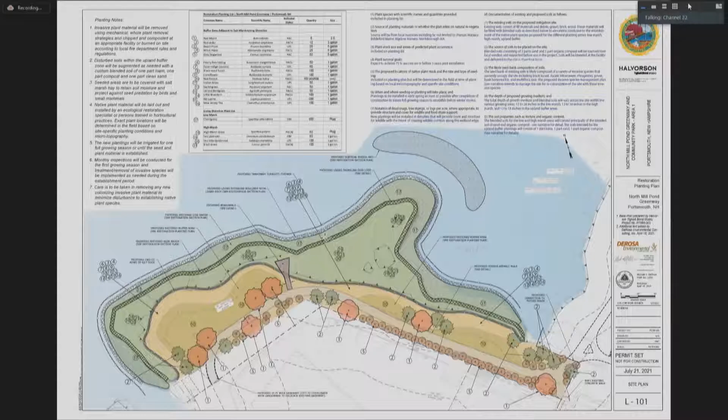At the October meeting, you folks had expressed concern with the size of the boardwalk. So we have since reduced the scale of that, in fact, over half as much as what was previously shown. It previously had jutted out in this position around the tower. It was over 700 some odd square feet. So it's since been reduced to just this little vantage point out into the pond. The reduced impact is over 375 square feet from the previous design.

And again, that boardwalk design contemplates a grating rather than a traditional wooden boardwalk, so you're getting that light through the pier itself, and we're also using those helical piles to minimize the disturbance for the support of it.

Number two, you folks had expressed in October and discussed further at last month's work session the concern with the width of the path. The 10-foot is a standard that we're trying to hold, particularly with a dual-sided multi-use path. But we've taken away those 1-foot gravel shoulders on either side. It's basically the same detail you can see if you're familiar with driving in Pease down Grafton Drive. That's a porous asphalt path, so it's basically the same exact design.

And the third point was the existing trees greater than 6-inch caliper will remain on site, and we agree to that. We haven't done a detailed tree survey yet. That's something we'll have to go out and do and mark. Certainly in the vicinity of the path, those trees would need to be removed. If any of the grading impacted the health of the trees, those would need to be removed. But we know you folks are trying to keep those larger Norway maples intact, greater than 6-inch caliper, so we agree to that. So that really is the summary of the changes to the plan.

Other questions, commissioners? I had a couple of questions. One was on C-101. It says you're going to be removing the no digging and the no trespassing signs.

I know that on North Mill Pond there's a lot of issues with digging, so I didn't know if that was going to be replaced somewhere else. We're happy to have you stipulate, work with the city staff on the appropriate signage to ensure that that doesn't occur. And the no trespassing, are we being unfriendly if we? We can't keep a no trespassing sign out there if it's a city park. That was out there to stop the digging that was happening when it was owned by Granite State Minerals. Okay. So just maybe the no digging? We can incorporate that into the signage.

Okay. Yep. My other question was, and this also came up with a comment letter that we received, the concern about geese in the area, because I know that there's another restoration project that is having a problem with geese, and that the large area of the red fescue might be something that the geese are going to be attracted to, and if there's a way to mitigate that. To reference the letter, there were a lot of good suggestions of isolating out areas within that red fescue to have more focused seating areas, rather than a lawnish kind of area.

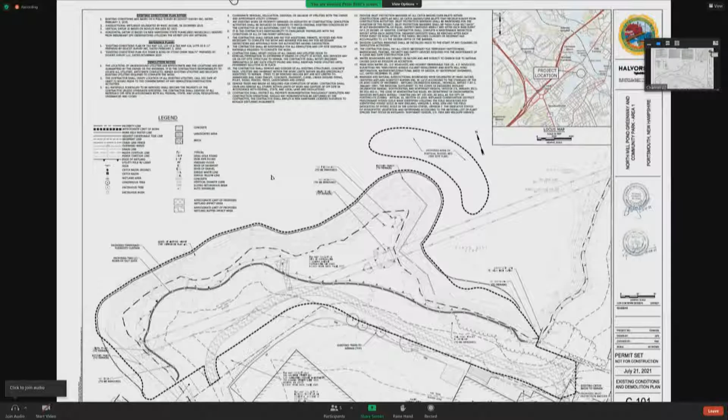Any other questions or comments from the commissioners? Are there any of the public here to speak to that at all? Or on Zoom? Oh, we have a Zoom. Nancy Johnson raised hand. Let's see. How do I do that? Okay, Nancy, can you hear us? Nancy Johnson? Okay, can you hear me? Yep, we can hear you.

I want to thank the Conservation Commission and Peter and Patrick. This is, in my opinion, a much improved plan, and I think it will come out very nicely when it is implemented. The path is much better not having the gravel on the sides. The viewing platform is smaller and relocated. I think that is super. My only suggestion would be that maybe some of the red fescue could be replaced with a conservation mix, which has wildflowers in it, and in places things like our fall aster, which is a beautiful plant and flowers well into the fall. It's one of the last plants for the pollinators and is easily mowed down when the mowing is done. So those are my comments, and I thank you very much for these changes. Thank you.

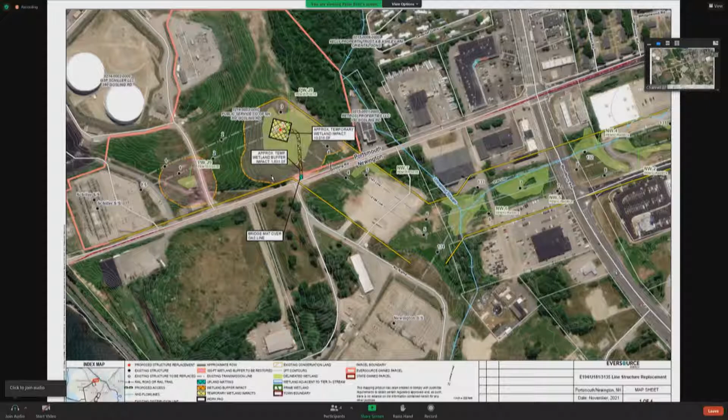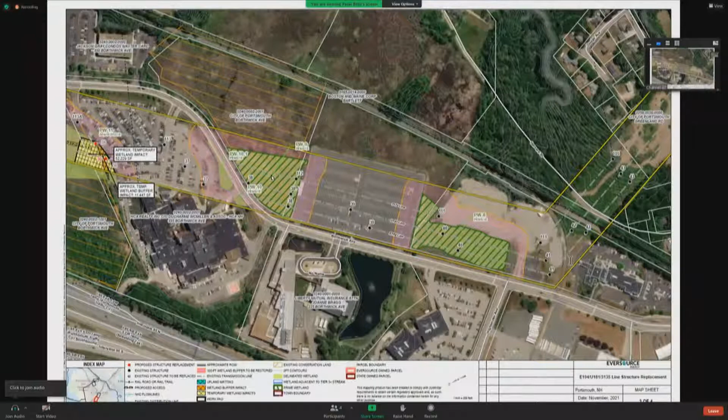So this is the 1 pole off of Gosling Road right here, and on the next page we have the 5 off of Borthwick Ave. Those ones are placed in pretty close proximity to each other. And then the final 2, let's skip 1 more page. And we have the 2 off of Greenland Road.

And so once work is complete, timber matting would be removed from the wetlands, and the wetlands would be stabilized with a seedless mulch to allow for stabilization. Eversource and GZA, we have coordinated with the Natural Heritage Bureau for rare species reports, and there are some rare plants in the vicinity of the right-of-way. However, with the timing of the project, they were okay with us using timber matting as a best management practice through these wetland areas.

And we're also in favor of not putting a specific seed mix down, in fear that the seed mix that would be used could outcompete some of the natural seed bed vegetation that's in the wetlands. And so at this point, we're proposing to stabilize with a seedless mulch. Are there any questions? Thank you. Any questions from the commissioners?

Yes. Andrew? Will machinery or tools be left on site when you're not there, like during off-work hours? They cannot be left in wetlands, so they would not be left on the matting. Okay. Any others? So you don't foresee any permanent impact, it's all temporary impact, is that correct? Yep. It'd be the temporary for the work pad and access. There'll be some vegetation that'll be impacted permanently where you're putting the poles? Yes, so the poles do get offset slightly from the original pole location, so there are footprints where the poles are going in.

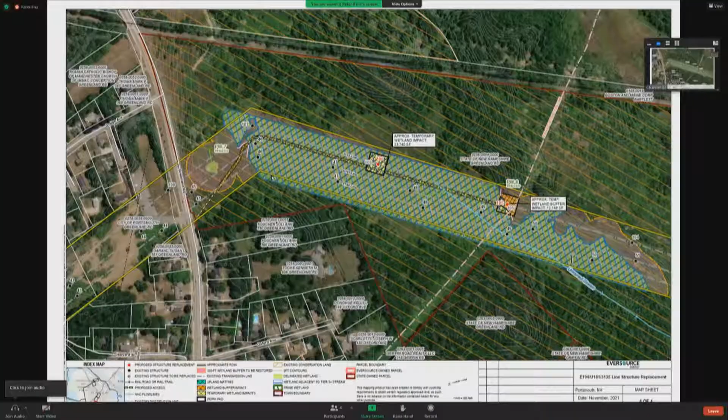Anybody else? Anybody want to make a motion? Oh, you got a question? Another question. In the area where your access road crosses Hodgson Brook, what do you do? What's the construction around that? Which page? On sheet 2 of 4. I believe you said the yellow line, over here. The dash line. Right. What are they doing down there? Well, that's what I'm saying.

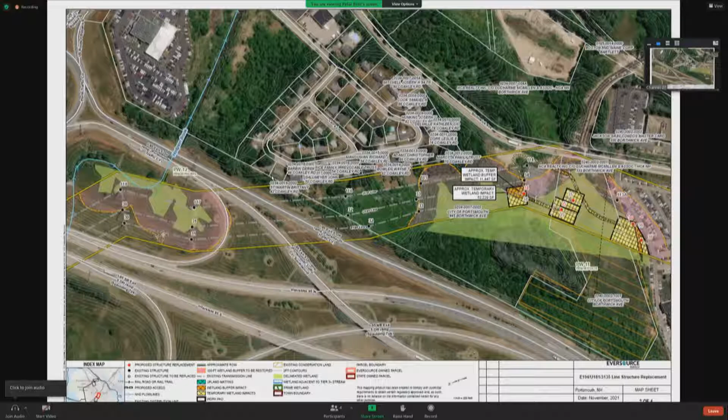On the left where Hodgson Brook is, it comes down there, is that yellow line the access road? Oh, so there's no work proposed at Hodgson Brook. That's the right-of-way boundaries, that's the corridor. All right, thank you. Sorry about that. Anybody else? Want to make a motion? Motion to approve. Second it? I'll second that. Any discussion?

I just want to mention that timeline again, since it's not in writing, the February to May. I don't think it has to be a condition, but it's just. That's, of course, the intended time frame. If there's emergencies or something that takes crews away for any reason, it does get altered a little bit. Just want to mention that. But that would be the target time frame. Thank you. Okay. All those in favor? Opposed? Abstaining? And one abstention. Motion passes. Thank you very much. Thank you.

Next item on the agenda is 960 Sagamore Ave. Thank you.

So this site is just under 1 acre in size, and there's about 400 square feet of wetland. In the southeast corner of the project, there's a little triangle of the parcel that sticks out and actually captures a small piece of wetland to a larger complex to the south. So the 100-foot buffer line extends following it here through the property. And currently in that 100-foot buffer, there's approximately 750 square feet of gravel parking area and an above ground propane tank in that area.

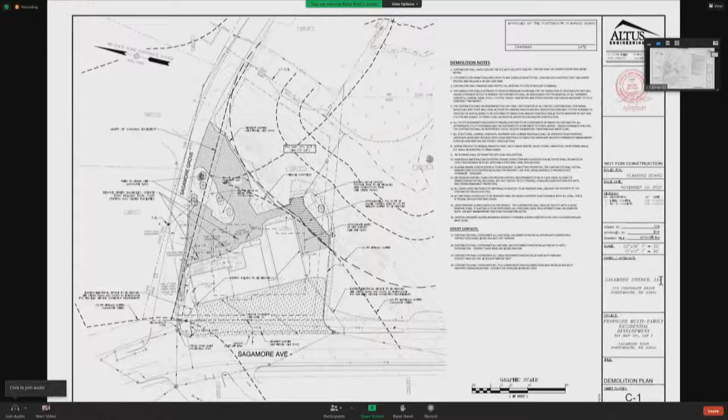So can I get to the next one? Do I need that? Sure. Here you go. Good.

So, going all the way back to when we were doing the zoning application, a piece of the corner of the proposed building was actually extending over into the buffer area, and the rear parking lot area was configured differently and was also extending into the 100-foot buffer area. But the owner of the property was very adamant that we wanted to keep all structures and all parking out of the 100-foot buffer, so we shifted the building, realigned the parking and did a different configuration to keep everything out of the 100-foot buffer.

We went through TAC. We had a TAC work session and then TAC hearing yesterday. Through the TAC process, we were proposing to underground the propane tank in approximately the same location, which was within the buffer, but we've moved that completely out of the buffer as well. So current plan right now, we're moving basically everything out of the buffer, reduction of over 750 square feet of parking, gravel, pavement area. And the only thing that we do have in the buffer is a very small 10-foot by 10-foot patio area that would be for the residents.

So, let's see, if you have the full plans, on the first sheet of architectural plans it has the gross floor areas. So the first floor of the building is 7,097 square feet. Can you say which, we don't have that plan, I don't believe. Yeah, right there on the bottom left. That's not in your set? I don't have that plan, at least I don't believe. Some more pages back in your plan set, no? It's like the last pages. Andrew, it was the second to last page of the package. I don't have that page. Yeah, yours is really thin. Evidently you must not have got the plan set.

So I think in the drainage report, we also talked a little bit about the numbers as far as the proposed impervious area. There's rough numbers. In the back, really, we have our building, and we have our rear parking area. There's very little sidewalk on the project, there's some. The two driveways, the back porous area is about 1,800 square feet of porous pavement that we're using for treatment on the driveway area. But again, I don't have the exact. That's fine, I was trying to get a total disturbance area outside of the wetland buffer. These help a lot. I was trying to get a context of that.

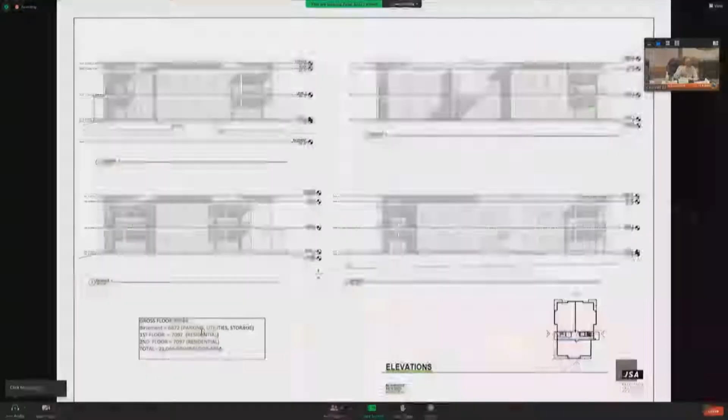You good? Jeff? I know it's all laid out here, but could you just kind of help me visualize what this is gonna look like? Like if you're facing the building with the retaining wall and that building sitting there, compare height-wise, compared to the street? Yeah, so let's see, the lower right elevation is your street view.

Looking at the grading plan, it's set back quite a good distance from the roadway, so it's 36 feet to the bump out from the edge of the pavement of the road. So it's about 40 feet really to the face of the building. There's some bump outs in the building. Just after the right-of-way, we're constructing a small retaining wall to sort of have that separation between the road. It's about midway between the building and the edge of pavement of the road.

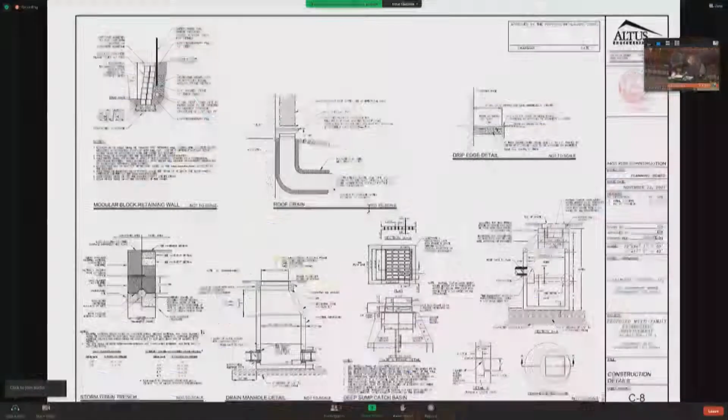So we're really trying to preserve the trees in this area of the project. There were some trees, again, nothing of significant value, in this area where the parking is going. But really, there's not a lot on the existing site being removed. A lot of the site is actually parking. The existing site is pavement, gravel parking area, building. Again, with over 8,000 square feet of reduction, all that area is previously developed. So we're converting a lot of that to green area for the project.

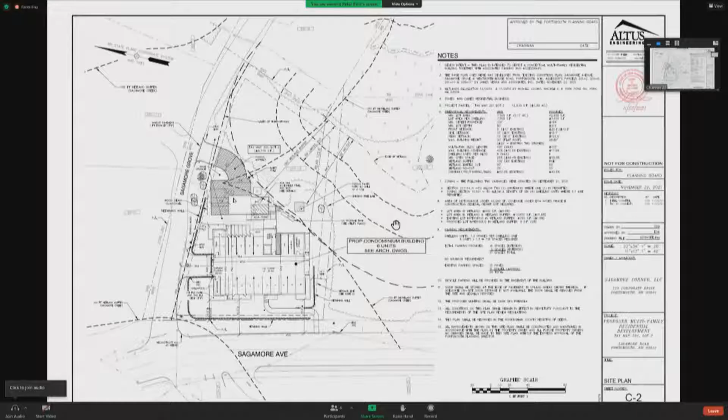Okay. So you won't be going down and removing anything in the buffer either? No. So is there an opportunity to add a little bit of vegetation along the edge? Because that buffer is pretty much tall trees, like where the people sitting area is that you have? I know that was something the city staff put in their memo. Yeah, at the edge of the lawn area, that's what I was thinking. Transition doesn't have any plantings there.

So, currently what we're proposing, actually, can you go to the landscape plan? Yes, so that's it. So we're adding, and Robbie can probably talk to this a bit more than me, some plantings around the front and side of the building, and some trees in the back. We're trying to preserve the tree line here. And this small flat area in the back where we have that lawn area, we're trying to keep a small piece accessible to the residents for a little patio and gathering area.

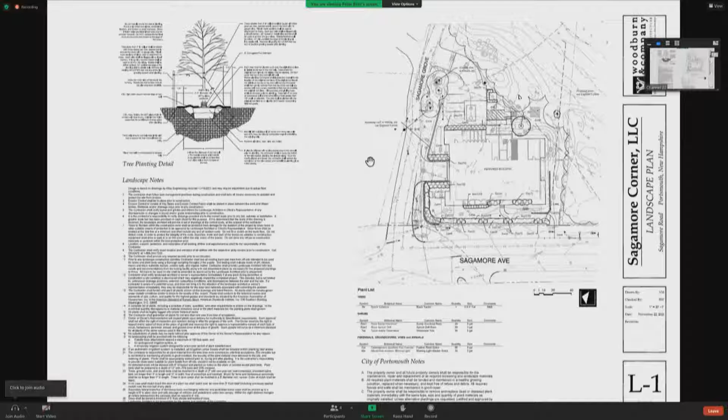So we are not currently proposing any additional planting in this area. As you can see, it's quite a small area as it is. I think we've been talking about around the perimeter of that grass area, the back area. Yeah, not right around the patio, but kind of along that tree line.

They have lots of stormwater controls along the roadways, but there's nothing along the back. It looks natural; there are some high spots that seem to separate from the wetlands, but down by that patio area is a bit of a low spot. So if it added some plantings in there, it would help separate that area and add an extra control between that and the wetlands.

My name is Robbie Woodburn, I'm the landscape architect. I thought I'd jump in. The paved area there is only 10 by 10, so imagine a grill there and a couple people standing around it. Currently it is a grassy, lawny area, and with the topography you're looking down a slope into the woodland, which has some nice character if you're standing out there cooking.

We did not put anything along the edge currently, mostly because it's a nice place to look into the woods. We can certainly add to that if you direct us to do so. But it's meant to be very simple and stay in keeping with the way it is, except for that paved area for the grill.

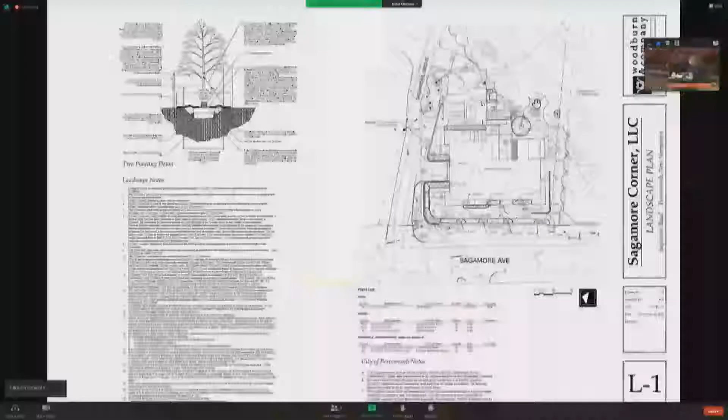There'll be building mounted lights to light the doorways and entrances, and we have one little bollard lamp on the walkway that leads down out of the building towards the ADA parking stall. So there's one bollard light, one street light. I believe it's a 14-foot light, so it's dark sky compliant and all that. Okay. And there is a lighting plan. I think it's the next sheet, actually, if you did want to look at it. Oh, no, maybe the previous sheet.

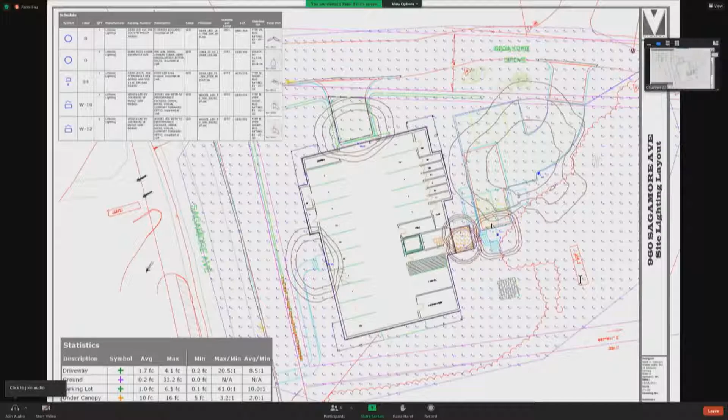Right there. Yep, there it is. That's right. I remember seeing one. So the one street light is right there. Okay. Or, sorry, right over here, at the corner of the parking. And then a bollard light on the walkway down to the ADA parking stall. Okay. All right, thank you. Any other questions? We could do a motion? Anybody want to make a motion? I'll make a motion.

I move to approve the conditional use permit application for 960 Sagamore Avenue with a few conditions. I think it's important to have a delineation or some sort of distinction on that 10 by 10 patio where it's highlighted that somebody is directly abutting sensitive land, sensitive wetland, sensitive conservation land, whatever you want to designate it as. It would be nice to have some sort of sign, placard, illustration that says, please be mindful of what is around you, so that we're not contaminating that at any point. So however you'd like to word that.

And then along the existing stone wall and along the existing tree line, or the vegetation line, maybe including some native plantings and native species that may make that more robust and more of a buffer that people can identify really easily, so that the runoff or any sort of change in terrain right behind that building does not affect the wetland buffer in the future. It can be whatever the suggested amount is, just a nice buffer. Is that clear as mud?

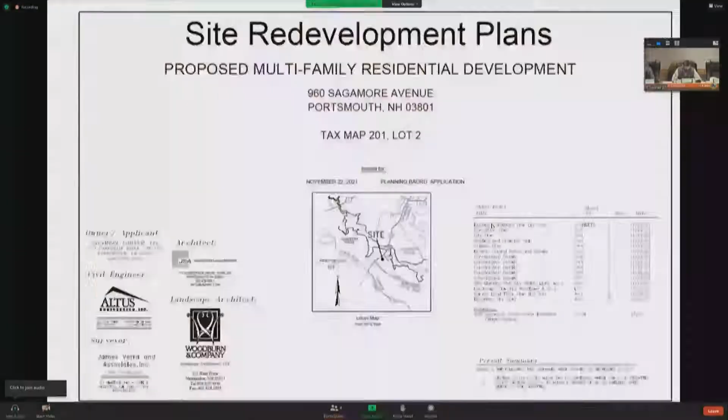You went past it, that one, Peter. Okay, so along here and along here. Correct. Okay. So, thank you. Anybody want to second that? I'll second that. Thank you. Discussion?

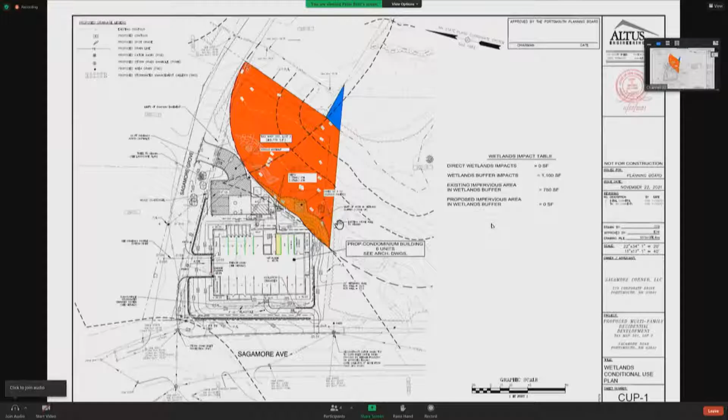I would just sort of concur with what Andrew said, that I think if we can, whether it's part of the condo docs or signage or something, just make it very clear to future residents that they are sitting on the edge of a very important wetland and near the creek. That would be really important to make sure that they are mindful of that, and that it's part of the plan for taking care of this parcel in the future.

I would say I do appreciate that you considered the lighting and you actually have snow removal on your plan, which is nice. That's outside the wetland buffer, so I do appreciate the effort in trying to make sure you considered some of those pieces when you were designing this, so thank you for that. Thank you. Yeah, likewise, I think that's great. We just want to make sure that future residents, wherever they're coming from, if they're from out of town and unfamiliar, that they know what they're sitting next to, and so that's how we want to steward our property in the future.

That's all. Anybody else? Some plantings along here, yep, and then around that way. Sound good? Yep. You guys have pretty much already said it, but I just really want to say it's really nice to look at a first plan where it's out of the buffer zone for the most part. So, thank you. I don't see many of them when I'm looking through the city CUP stuff. So, thank you. Yep, definitely. It's a good application.

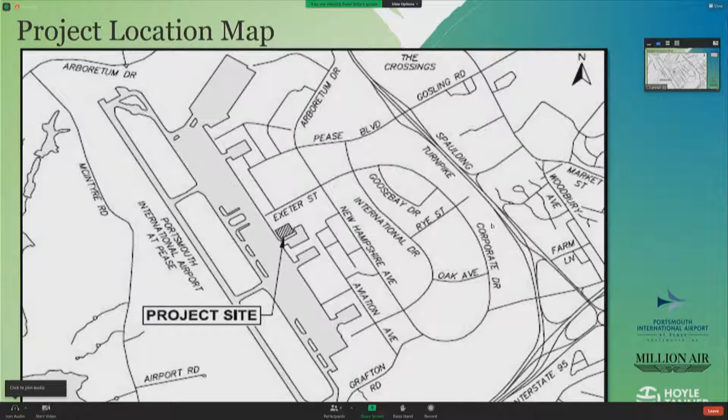The applicant is Pease Aviation Partners LLC, which is also known as Million Air. The property again is owned by PDA, and they will be leasing the property to Million Air. It consists of installation of a new fuel farm and an FBO, a fixed base operator facility, which will have hangar space and office administration space. FBO is a term that gets thrown around a lot, but in this case it will be a building that will contain these operations. And then there'll be a slight shift of the existing airport's wildlife fence around the areas of development. So next slide.

In the preparation of the application, we addressed environmental resources. With Fish and Wildlife Service, as you may know, the northern long-eared bat is identified in this area of New Hampshire. We will have some minor tree clearing. It will be consistent with the Endangered Species Act 4(d) rule, which means we'll have no tree clearing in the months of June and July. That's part of the review for the U.S. Army Corps of Engineers, but we addressed that as well. There were no species identified during the Natural Heritage Bureau review. We don't know if we have invasive species out there. We didn't do an inventory yet, but if they are encountered, they will be dealt with using the state's best management practices. Next slide.

Cultural resources. There are no cultural resources that were identified on the property. We will meet the water quality and erosion control standards. We'll be using typical BMPs for the project. We will be applying for the state DES as well as the Army Corps general permit. An alteration of terrain permit has also been submitted to DES. Next slide.

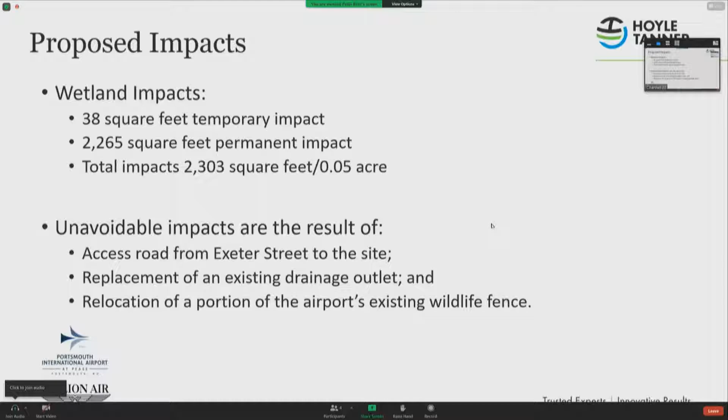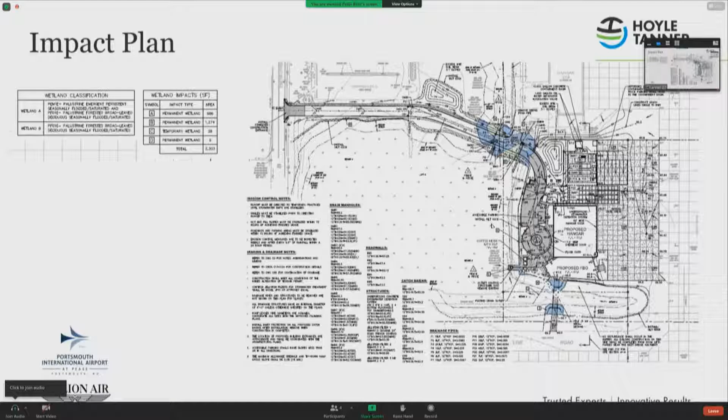So next slide. This is the impact plan. I know that you have plans in front of you to look at in better detail than what's here, but we do show that here. I don't know if you want to ask any questions at this point. I believe that might be the last slide. So you can leave that up if you want. And I'm here to just answer any questions about the project. Any questions? And then there's more presentation? Nope, we're all done. So that's it.

Okay. Questions from the commissioners? If it's easier to see, the impacts are on plan C8A in your plan set. I don't know if that's easier to put up instead, Peter, but it's up to you. But if everyone has the plan set, sheet C8A is what shows the wetland impacts.

Do you want to briefly go into more detail about the stormwater runoff? I see that you have it noted here on C8A. But just in terms of runoff, containment of that runoff and how it is treated. That is a great question. Sean, you want to answer that? Sean did the stormwater drainage design. Yes, good afternoon, everyone. I'm Sean Toby, the civil engineer for the project.

So with the site itself, all the runoff from the road coming into the project goes into closed drainage with catch basins that are offline, deep sump, and then they go into a Contech Jellyfish filter, which is a self-contained device that provides treatment meeting DES standards. And so that portion of the road, once that's treated, will be discharged into the wetland. The remaining portion of the site, everything pretty much from the wetland impact crossing.

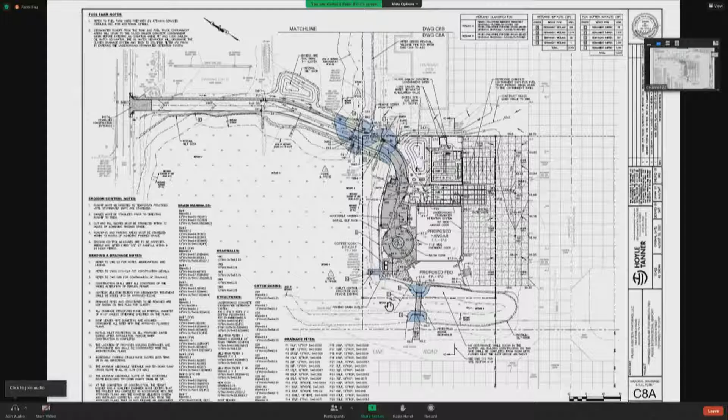What are the two head walls that drain right into the wetlands? Head wall 1 and head wall 3. Looks like they drain right into the wetland. Oh, yeah, sure. So there's two wetlands there. There's one to the north and then the main one to the south. So for two of those head walls, there's a pipe that provides connectivity between the two, because right now all the wetlands are kind of in a bowl. They don't drain off anywhere on site. So that's going to allow that northern wetland to drain into the southern one. And then the other head wall is just the discharge of the treated water from the access roadway.

And then there is one additional head wall there as well. That's an overflow for the wetland itself. Right now, that's how those wetlands drain. When they fill up, there are head walls there or drop inlets that take the water off site to the closed drainage system I mentioned earlier. So that's just a replacement of the one that's being impacted during the road.

So Catch Basin 4 and Catch Basin 3 go into a drain manhole and then into the wetland. Is that correct? They go into a drain manhole and then a treatment structure, the Jellyfish structure that I had mentioned before that treats it. Yeah, I'm not familiar with that. Could you explain that, please?

Yep. So it's a large concrete structure. The water goes into it, and it has a series of filters that almost look like jellyfish tentacles, so that's the name of that structure. As the water passes through all those filters, it catches all the pollutants, contaminants, and it's a very dense filter, so that by the time it's done with it, it's captured all the pollutants to a state standard. So it's state standard clean water coming out of that.

Is that on a regular maintenance and replacement schedule? Correct, yep. Those are maintained, and within the AoT report, there's a full inspection and maintenance schedule specific to those structures themselves as well. Okay, thank you.

And why are you connecting the two wetlands? So as Sean said, if they overfill, there will be flow between the two of them. And so there was concern, we didn't want to block the hydraulic connectivity between those two. As they're delineated currently, they are separated by a small strip of land that is upland, but the road will elevate it slightly, so we didn't want it to go over the road. So we wanted that connectivity at high flow levels to be able to still remain.

So there's not a typical flow. There isn't a drainage channel there. It's just that during certain storm events, there may be connectivity, and DES would like to see us not block that connectivity. Because if they did, then we'd be going over the road, and then there's introduction of contaminants. It's just much better to have a pipe that goes through there and allows them to equilibrate to what they want to be. Thank you.